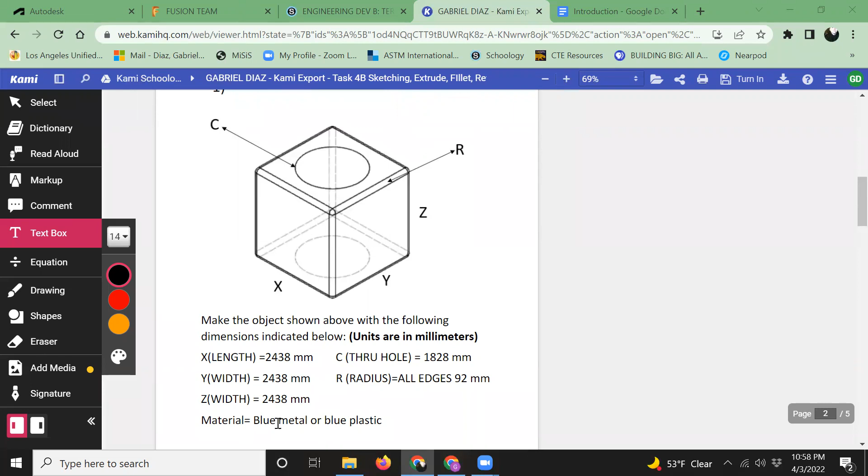So I will go over every step. Please make sure that you use this tool and go back and forth as you see fit, and only move on once you have mastered it and followed along with me. So let's jump in.

The first thing I'm going to want to do is save my file. I'll call this 'box with through hole.' Put it in the right location. Once I know it's in the correct spot, click the arrow, click save.

The first thing we want to do after we save is change our units if necessary. If we click this icon under our browser tree, it's called our browser tree, we can click it on and off. Here we can select our units: centimeters, meters, millimeters, inches, and feet are the only ones available to us.

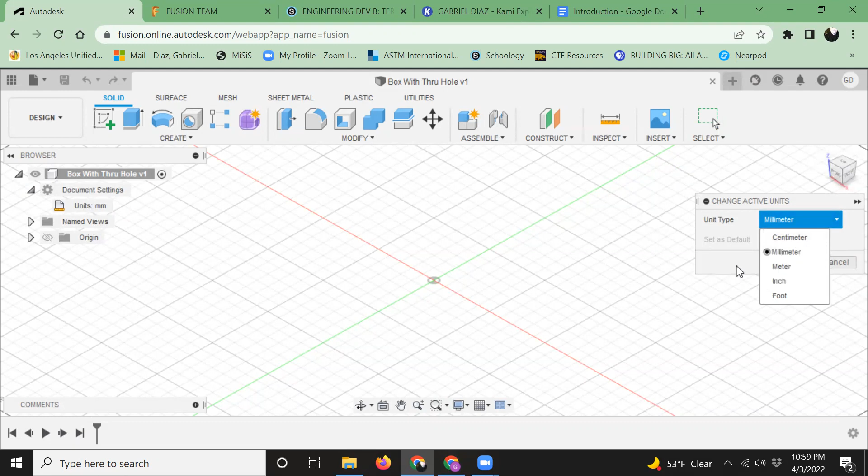So we're going to be in millimeters this time. Click the arrow, and be checking your document.

So I'm going to start with the base. That would be these three numbers: 2,438 for length, width, and height all the way around.

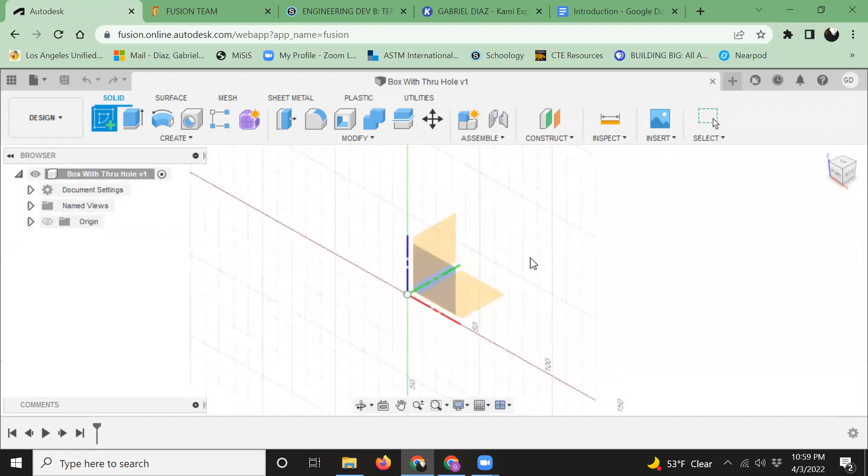Once we have set up our units and saved, we're going to create a sketch. Now every object's going to be different, so here I'm going to create it on the bottom plane.

The origin is very important when working with Fusion 360. We usually want to reference our starting point to make sure any analysis you do is correct, and to generally make your objects more organized. It's a good rule of thumb, so please make sure you do it. That's actually how it's done in industry as well.

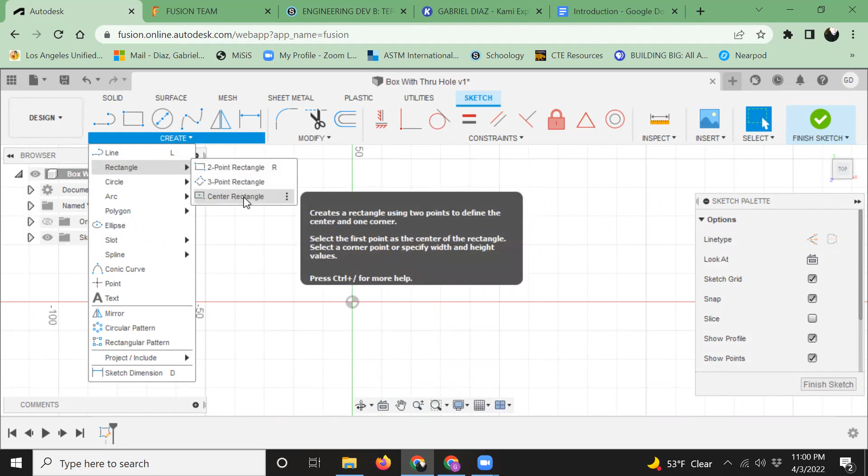So I'm going to create a rectangle. We go to create rectangle, the shortcut is R. I also have a center rectangle option, and I like these, so I'm just going to do a center rectangle. Left click - I'm using a mouse right now - scrolling out, and I drag.

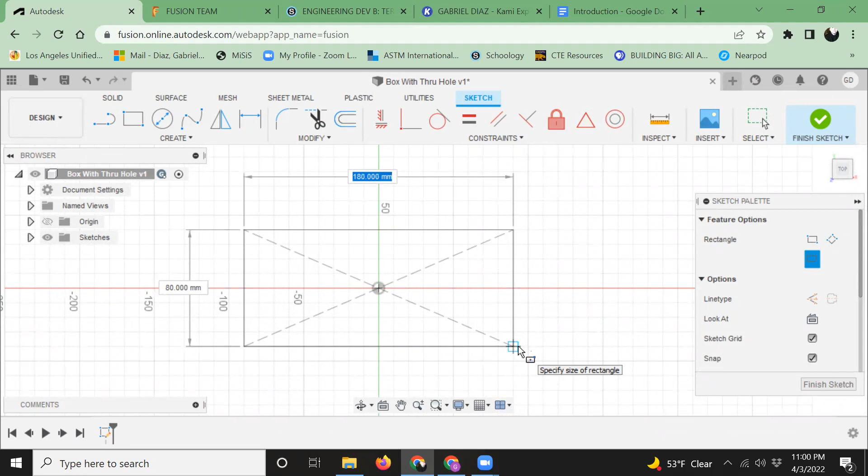Now when it's blue like that, it means it can insert a number. So let's start with 2,000 - we need to make sure we know our values. So, 2,438, create a rectangle. 2,438. If I hit tab, it takes me to my next dimension, 2,438.

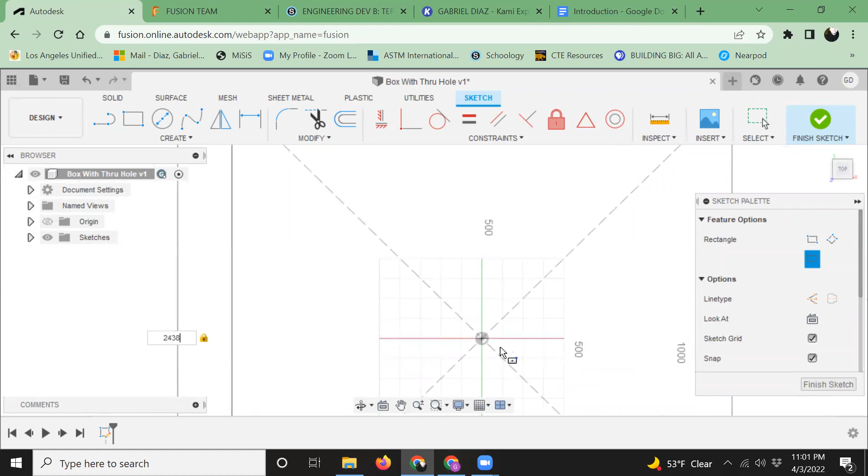And we hit enter. When it turns black, it means it's fully defined. If we want to modify our dimensions, we just click them and drag. It's good practice to center your dimensions always and make sure we are very clear. So that's clear, I can see them.

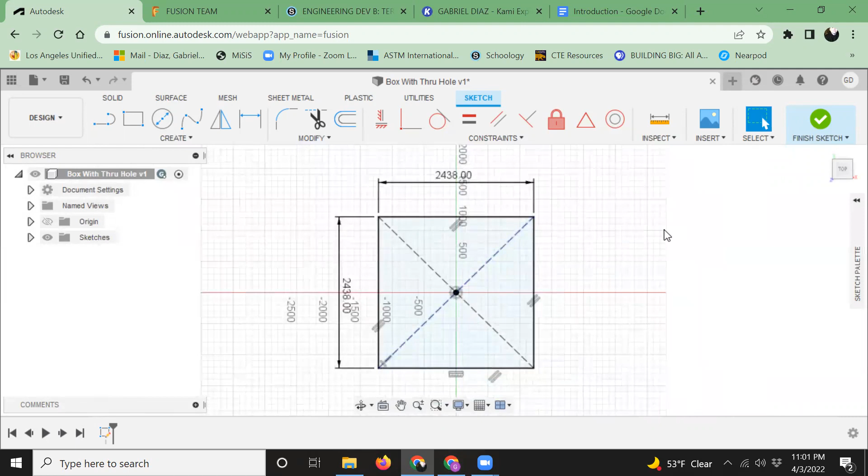Now we're ready for our next step, so we click finish sketch. Select the home icon, this is called the view cube, and it's going to give you a good orientation for an extrusion. The extrude tool is a 3D tool that adds depth, or it can create, or it can cut. Let's take a look at what that means.

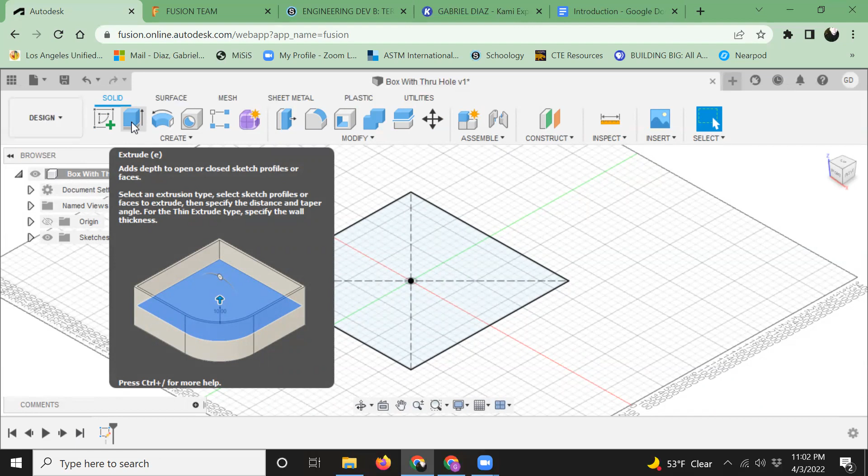So we select it, or we can hit the E key for a shortcut. It should light up blue, just like that.

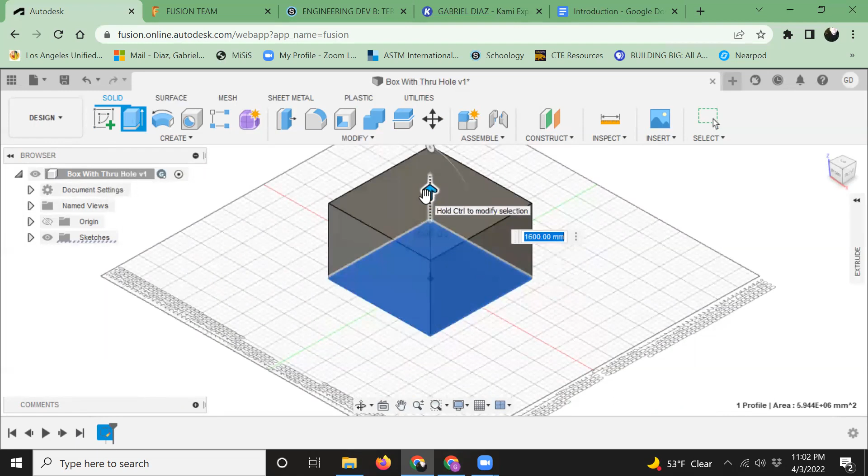Extrude it. So what I did was I left clicked and I pulled, so I can pull up and down. I want to go up and then type in my value, 2,438. Enter. Enter is going to be our last step. 2,438, X, Y, and Z, X, Y, and Z. So far, so good. Let's continue.

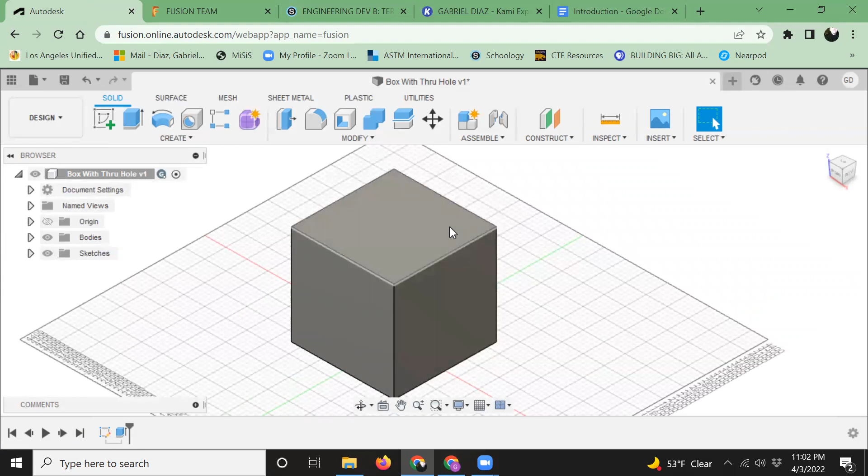So first we start with our cube. Now we're going to make a hole. Now we're not going to use the hole tool this time. That'll be for later on. Instead, we're going to create a sketch. And instead of selecting a plane, we're going to select the top face of the cube that we just made. So you can select faces and planes.

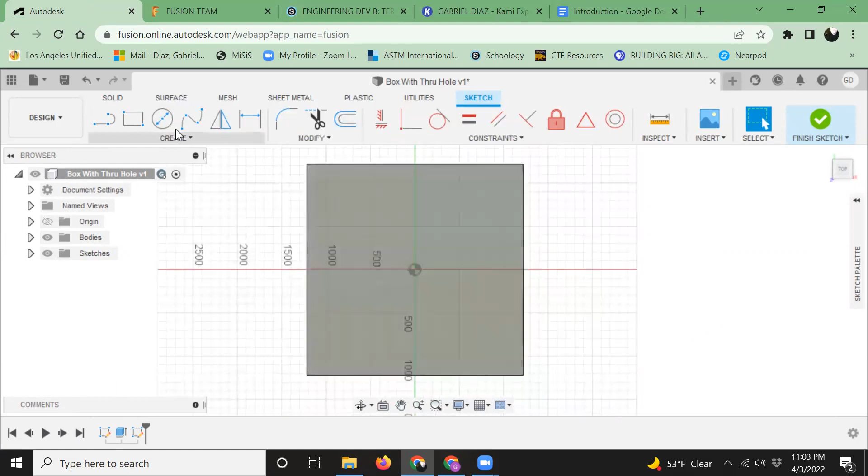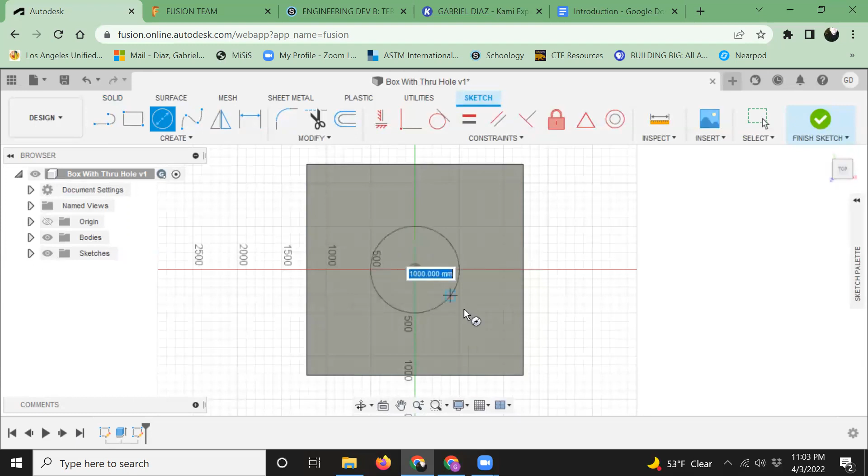And now I'm going to create a circle. The shortcut C, left click, based on the size of the circle in my instruction. So 1,828, that is the number I need. 1,828, hit enter. This is our diameter symbol. Now we have a circle.

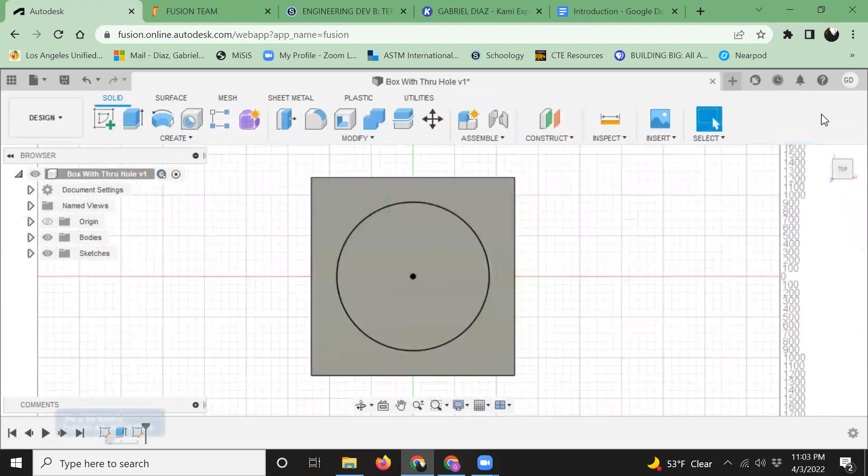And the reason we're going to do it this way is so that we can recognize that we can make sketches on surfaces that we create. So click finish sketch, the home icon. And now if I select extrude again, make sure the circle is highlighted, drag it downward this time.

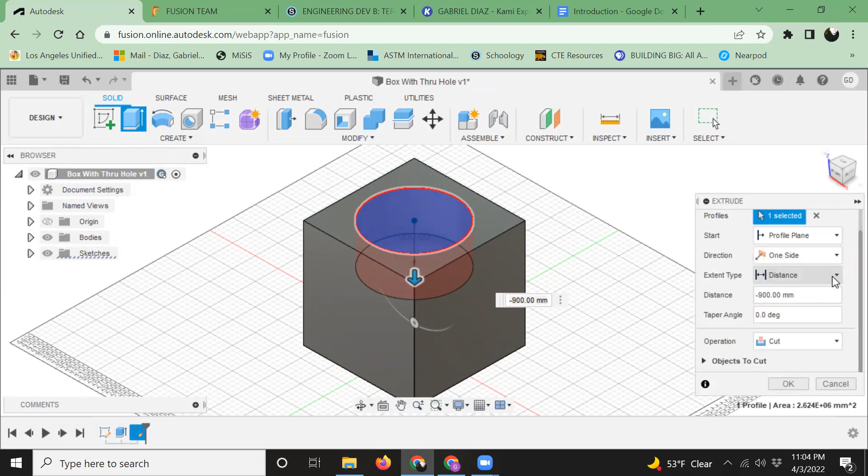And go to your options. And instead of distance, select all. This tells the program to go through the entire object, and it's got to be a cut. This is where we can change our options. So we want it to be cut, leave everything else the same.

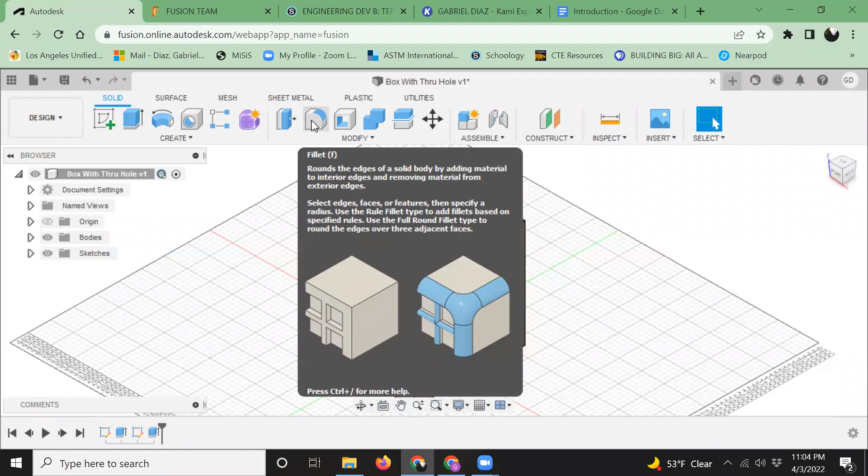So I've completed the cube. I've completed the hole. Now I just need to make sure I don't have any corners. This is achieved using the fillet command. Fillet rounds the edges of a solid body. It creates a radius. Shortcut F. Now, all I have to do is select all the edges I need. Before that, let's make sure we know our value. 92. Select fillet.

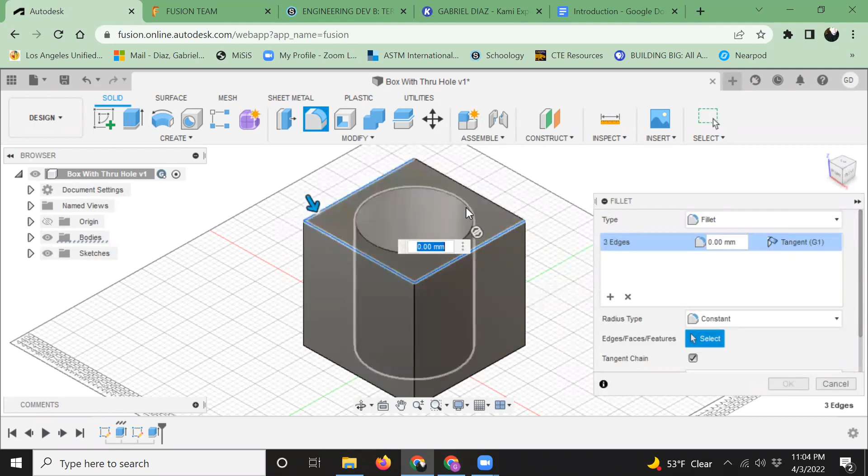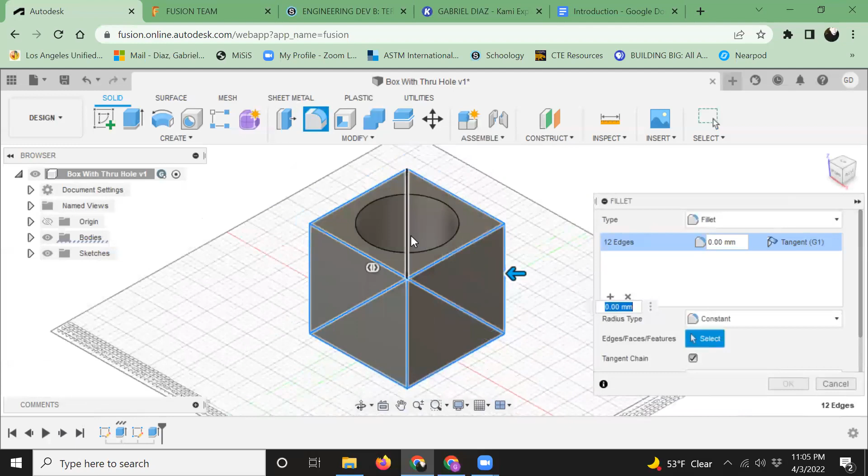Fusion 360 makes it really easy to select edges through the object, which is nice. So I don't even have to move. We just have to make sure that we are very careful in making sure to select everything that we need. So slow is smooth and smooth is fast. I've got all my edges selected. And now once I have them, I type 92, enter.

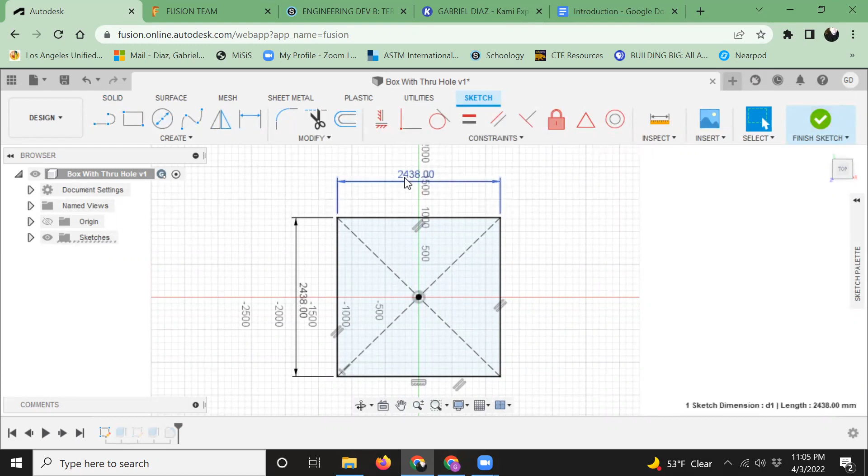If I want to modify, this is our timeline. So if I hit play here, it'll show all the steps that we took. This is where we can modify our sketches. If we double click, we can go inside and change our numbers. If I double click, I can do that. I can change the size of my radius if I just change this number here. So this is how we edit quickly, double clicking.

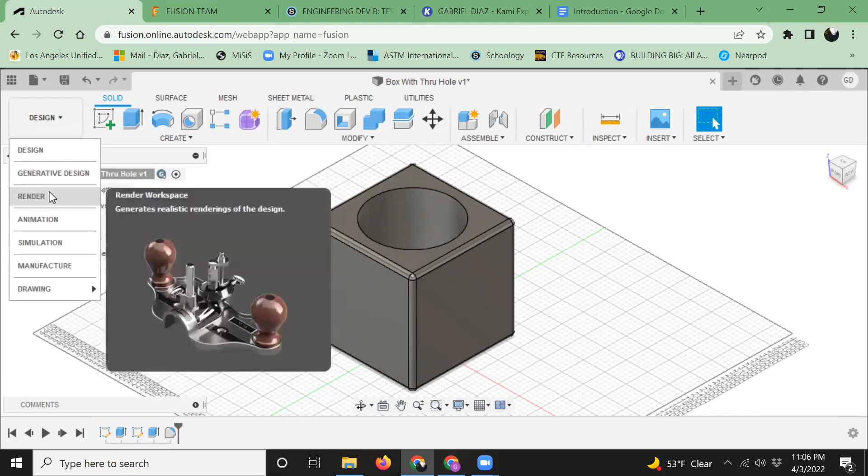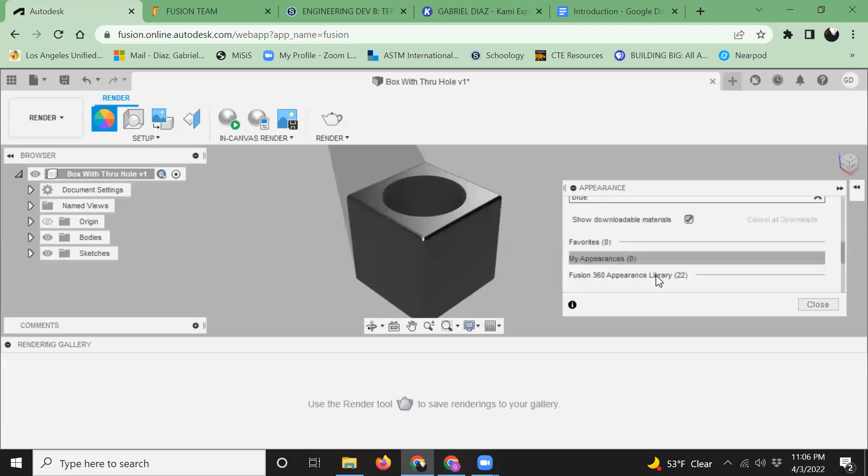Now our last step is to give it an appearance. So Fusion 360, like most CAD programs, allows you to make it look photorealistic. In the render tool, you go to render. And here you can select appearance. And sometimes it's tricky, you have to scroll down. We want a blue metal, so I just type blue. And sometimes it looks like this, where nothing appears. You select the last one, left click.

And you can select any ones that are available. This means it's not available. You have to download it. But any other one is okay. So I like the first one. You left click, hold, drag, and drop.

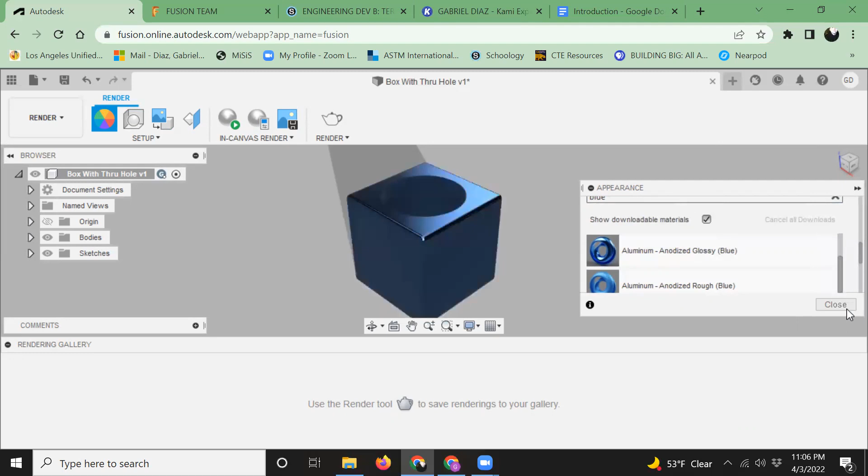Once you're done, go back to design mode. Make sure you save. You can hit the save or Control S, enter. So hit the save, hit OK. And now it'll show up in your library. So if I refresh, I could share this now

for my submission. So I have my Google Doc, Control V, hit enter, and we can move forward. File, download PDF to create a PDF, which will automatically download to your Google Chromebook.